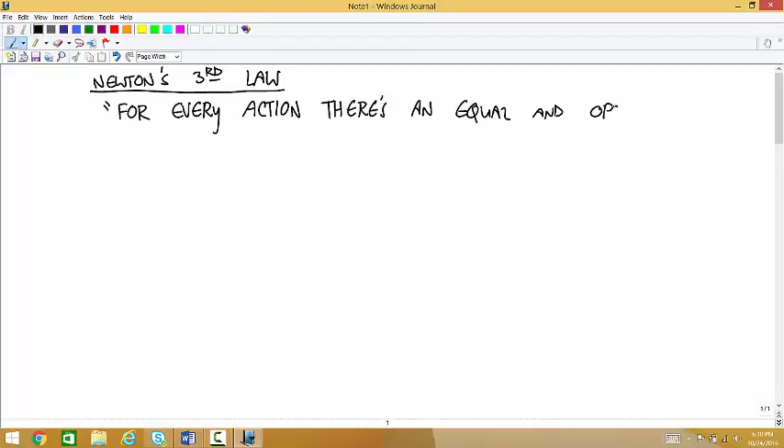So Newton's third law, as it was written, is something like this: for every action, there's an equal and opposite reaction. And that's pretty hard to use mathematically.

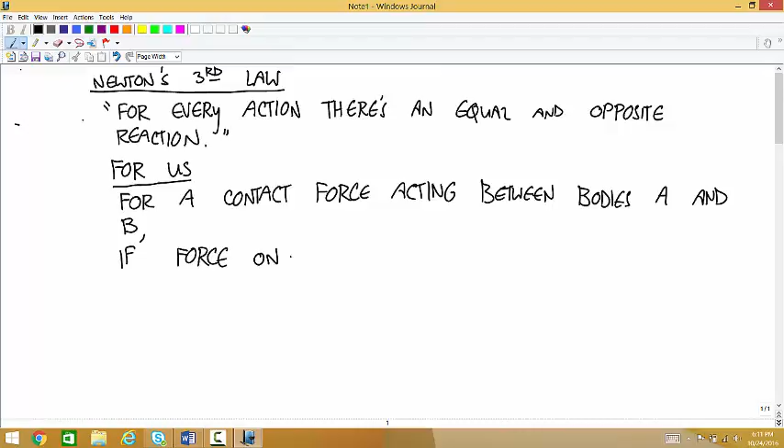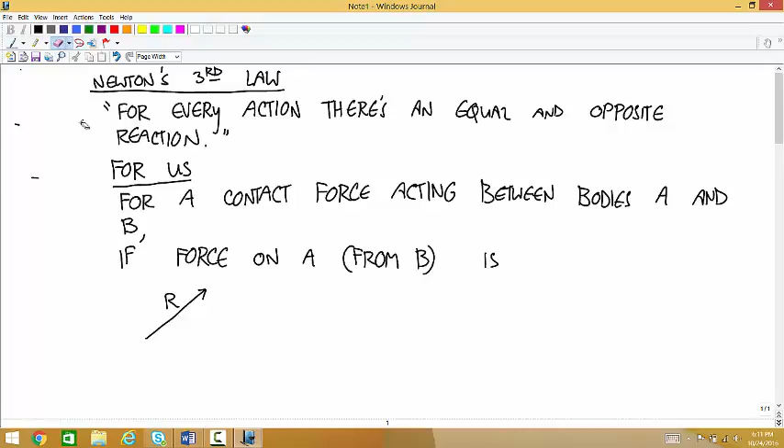So the way we're going to think about it is this: for a contact force acting between bodies, let's say A and B, if the force on A, and we're talking about this contact force, so this force on A has to be the force from B, is this with a magnitude of R. Then the force on B from A is in the exact opposite direction with that same magnitude R.

So going from one body to the other one, the magnitudes stay the same, and the direction gets flipped. The direction's opposite.

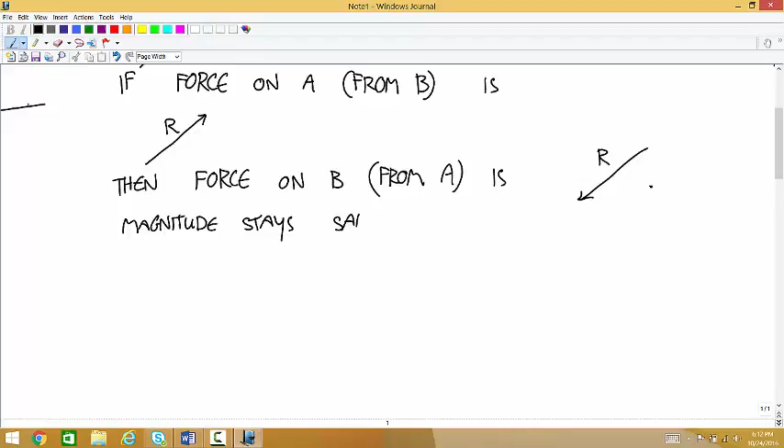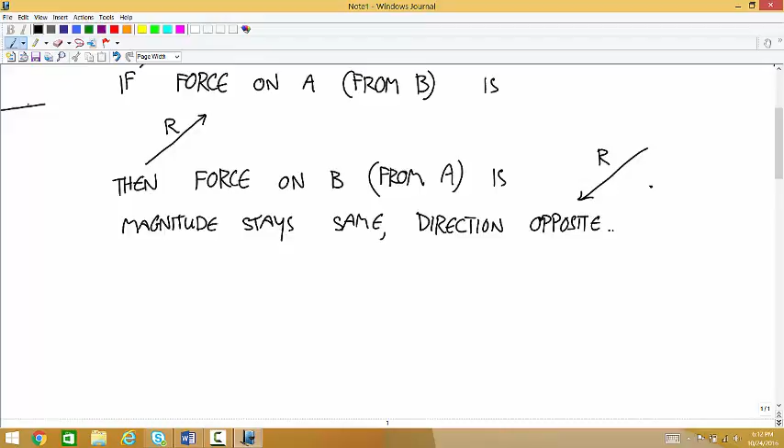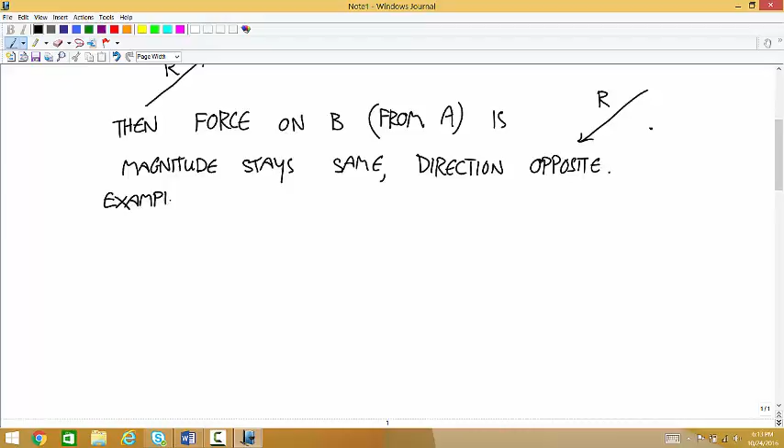So for example, if this guy is standing on the scale, and let's say he weighs 50 kilograms, and we want to calculate the force applied to, what do I want to do here, applied to the scale by the man.

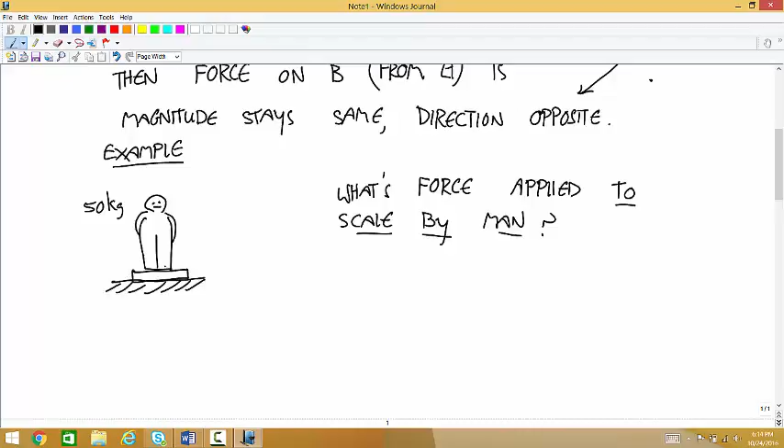Well, we're not given the mass of the scale, but say we knew what that was, say we knew it was 1 or 2 kilograms or whatever. If we isolated the scale, we still wouldn't be able to calculate that because you'd end up with 2 variables in the y direction. You only have 1 equation you can use in the y direction. And so the way to do it is we're going to isolate the man.

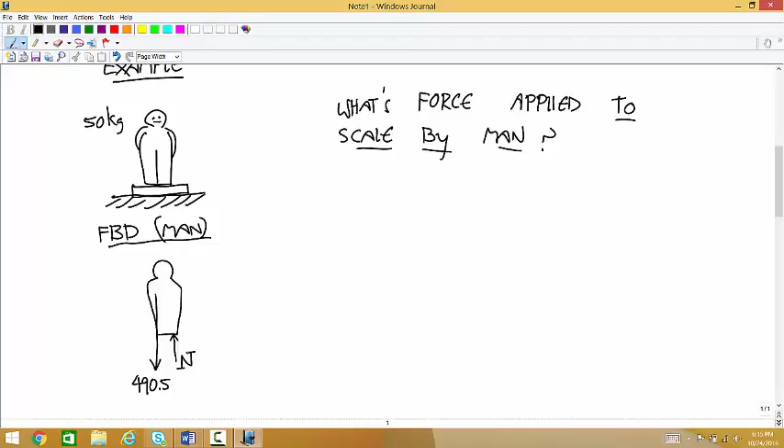There's the downward force of gravity. That's 50 times 9.81, so 490.5. Then there's this upward force, I'll call this N for normal. And Newton's second law says 0, negative 490.5, plus 0 n is equal to 50 times the acceleration vector, which is 0.

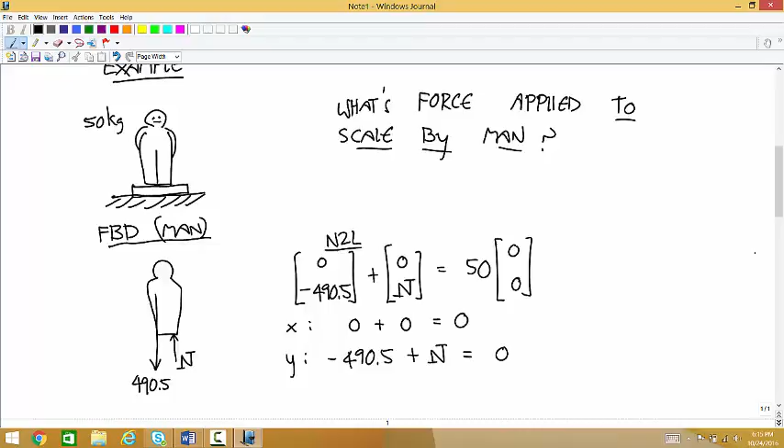And so you get an x equation that says 0 plus 0 equals 0, and a y equation that says negative 490.5 plus n is equal to 0. And so you can calculate that n is equal to positive 490.5.

Oh, by the way, this is something I'm going to do a lot when I use n as a variable for a normal force. I'll do like the fancy n with the shoes and hat. And when I'm doing it for newtons, I'll just leave it plain. Okay.

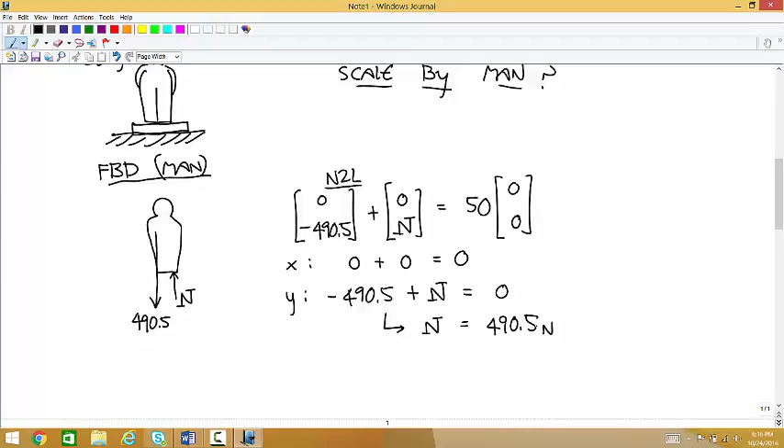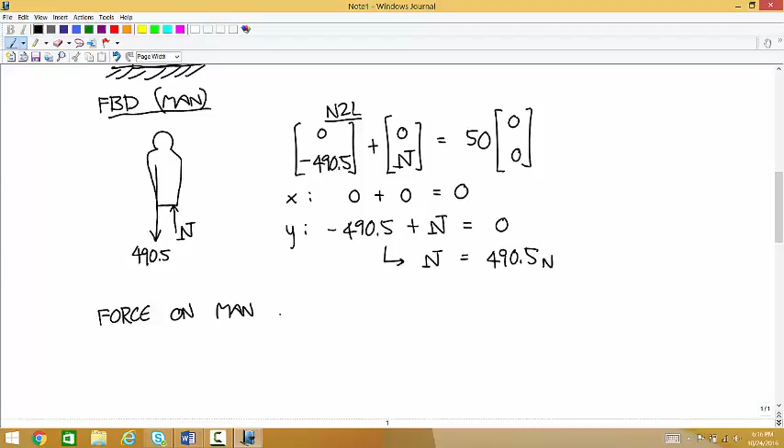All right, so in other words, the force vector on the man by the scale, we can get that by plugging this value for n into this vector. This is the force on the man by the scale. So plug that in, and you get 0, 490.5.

That's an upward force of 490.5. But that's not what I asked for in this question. I didn't ask for the force on the man by the scale. I asked for the force on the scale by the man. So to get that, we're going to use Newton's third law.

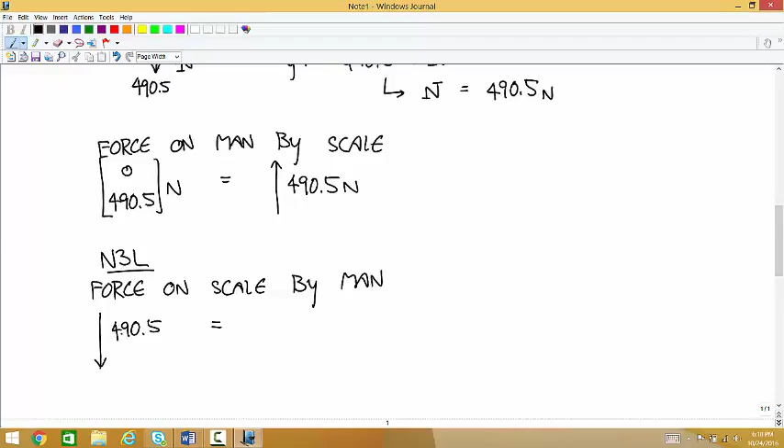Newton's third law says the force on the scale by the man. So we're dealing with the same contact force, but now we're talking about the one applied to the opposite body, and it is in the opposite direction, so down, with a magnitude of 490.5. If you put that in components, that's acting in the negative y direction with a magnitude of 490.5, so that's 0, negative 490.5 newtons.

Any questions about that? So that's Newton's third law. Do we have to go through all of those steps? Or can you just go, oh, it's 490.5 down, the normal force is? Yeah, you can do that. I think you'd be surprised a little bit at the pitfalls that come up, so it pays to be a little careful with it at first. But definitely that's what you'll do eventually after you've done a few problems. And maybe for some people it comes more quickly than others, for sure.

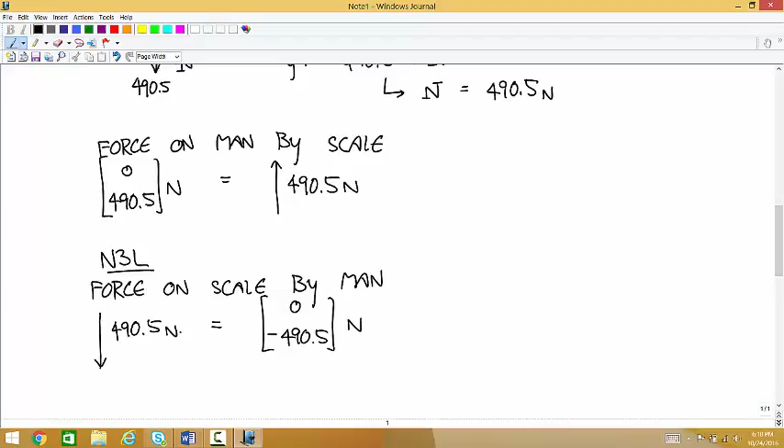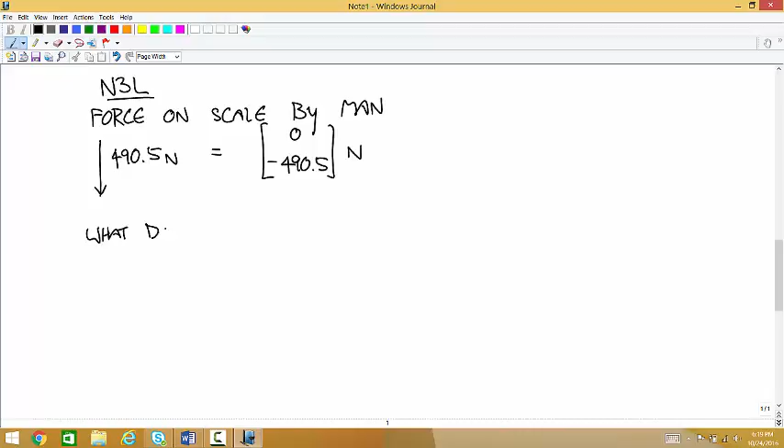But let's talk about what this means intuitively a little bit, because this is it mathematically, but what does Newton's third law mean? Its meaning is sort of counterintuitive. It sort of goes against your intuition about how physics works.

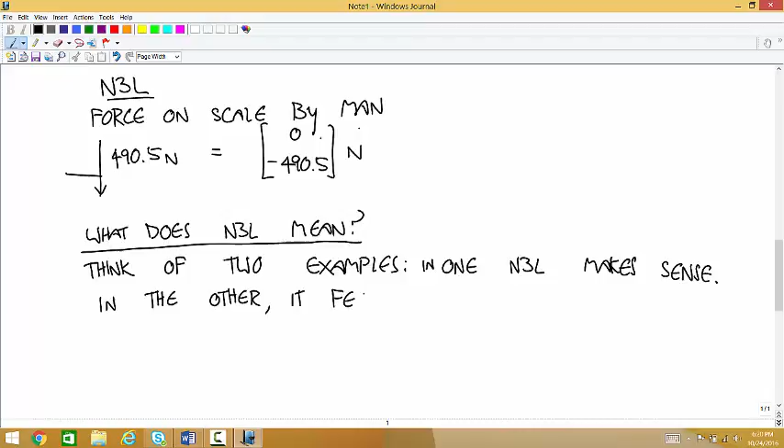So think of two examples. One, for most people, I think will make a lot of sense. It'll make intuitive sense, it works the way you think of it. So in one, Newton's third law makes sense. In the other, it doesn't - I think it probably goes against pretty much everybody's intuition. It feels wrong. Okay, so the first one - this is the one where I think your intuition about Newton's third law makes sense.

Now imagine it's a beautiful fall day and you're out on the soccer field - or somewhere with a barbecue, barbecuing, but there are some kids playing soccer. The ball gets by one of the kids and rolls over to you. You're minding your own business, tending the barbecue, and the kid says, hey, kick that back over here. You look up, and the kid is 5 or 10 yards away. Oh wait, this is important for the story - you're barefoot. You shouldn't barbecue barefoot. But the kid says, can you kick the ball back? And you're like, oh, no problem. You just kick the ball back, right? No problem - everyone would do the same thing, everyone would kick the ball back.

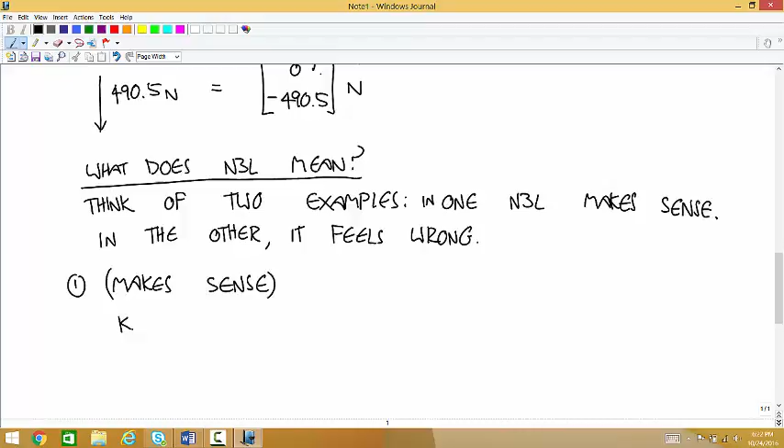So now imagine the same situation, but the ball rolls over to you, and you hear the kid yell, and you look up, and the kid's 100 yards away, and you're sitting there barefoot with the soccer ball at your feet. Now you have second thoughts about it - you grumble to yourself because you either have to bring the ball to them or kick it really hard, and if you kick it hard, it's going to hurt your foot. And the reason you know that is because of Newton's third law. To get the ball to go 100 yards across the field, you have to apply a big force to it. If you apply a big force to the ball, the ball is going to apply a big force to your foot - so that's Newton's third law. In our everyday life, we're used to the way it works - if you kick a soccer ball harder, it hurts.

Okay, now here's the one where it doesn't seem like it makes that much sense - it feels wrong. A home run hitter hits a baseball 400 feet.

Okay, so now it's a little harder to wrap your head around the fact that the ball is hitting this guy's bat as hard as his bat is hitting the ball. One reason it's hard to accept is you'd think, if that were the case, at least every once in a while the big guy with all the muscles would swing the bat, and the ball would stay right there, and he'd fly 400 feet. You'd think probably half the time, if it was really fair.

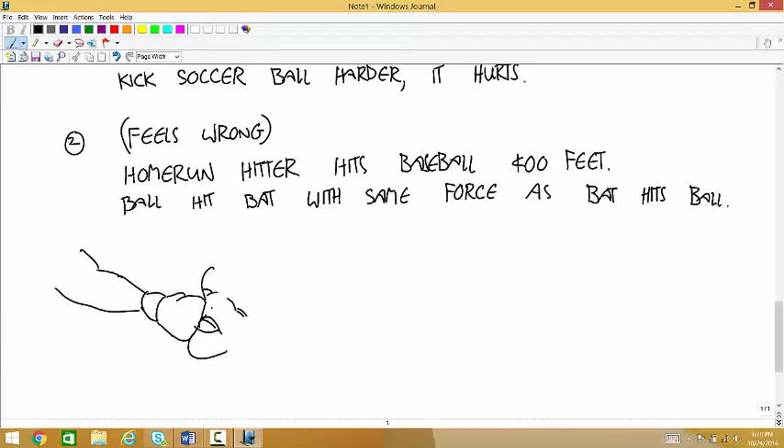And then he drew some version of this picture here. So this is supposed to be Mike Tyson's arm, and this is supposed to be his face. If I could hit Mike Tyson as hard as he hits me.

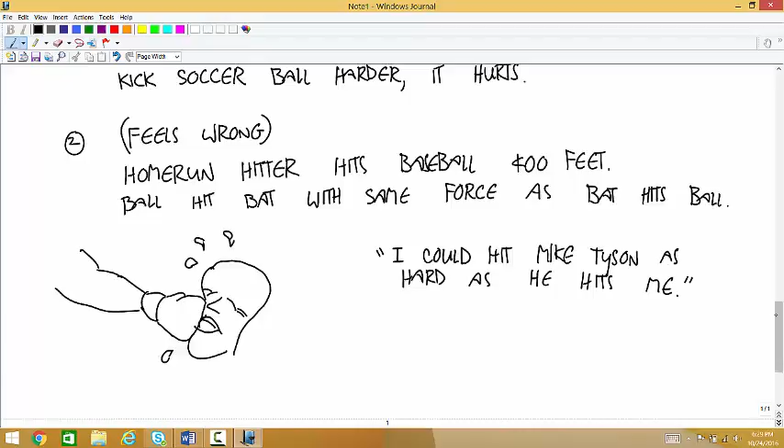And it's funny because it's 100% true. So let's think of the free body diagram of the glove, and a free body diagram of the deformed face. There's all this stuff going on over here and over here, but I'm going to ignore that. The only thing we care about is the contact force.

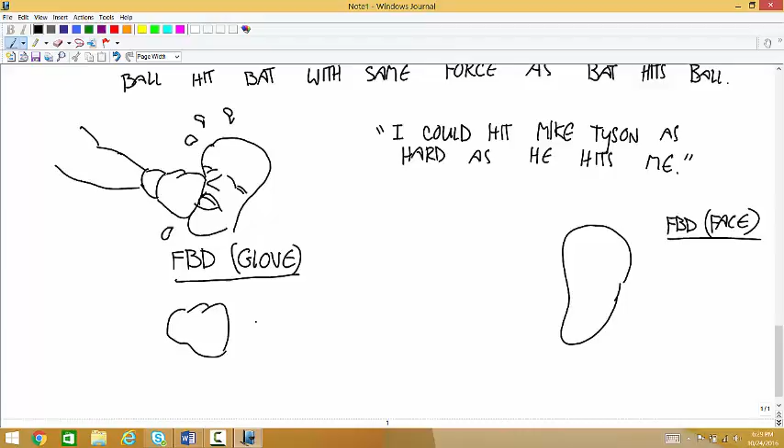The contact force says Mike Tyson applies a force this way of, how many pounds of force do you think? 2,000 pounds? Is that too much? 500? 100? Let's say 700 pounds of force. Okay, so Newton's third law says the face applies a force of 700 pounds to the glove. And if you had a sensor inside the glove, everything would check out, you'd measure it, that would be the case.

I guess the other reason it's funny is because it's not a very good boxing strategy to attack someone's fist with your face. The problem is there's a lot more important stuff inside your face than there is inside your fist. So these two forces are equal and opposite.

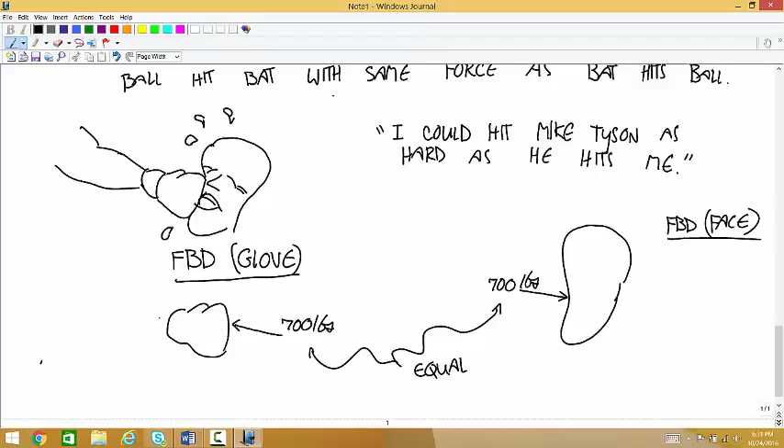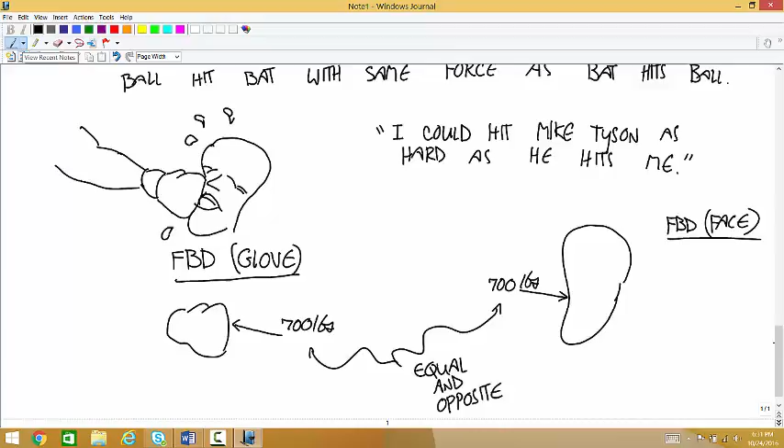Okay, so now let's use this in some problems. Let's say we have 3 carts rolling along the ground.

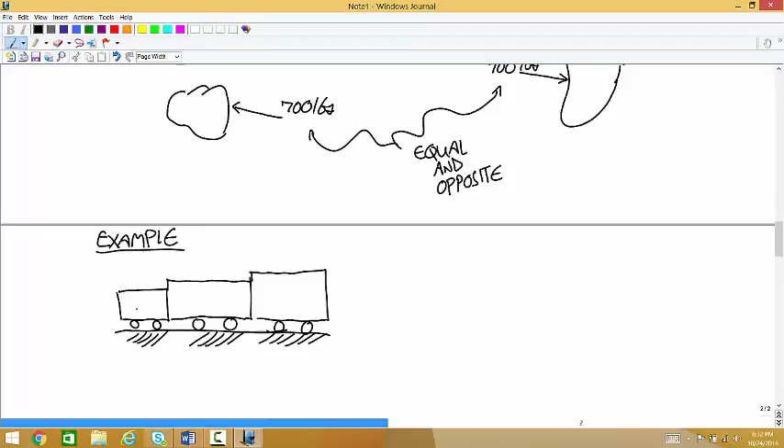This is 1 kilogram, the middle one is 2 kilograms, and this one's 3 kilograms. And there's a force applied to the right of the 1 kilogram cart of 25 newtons.

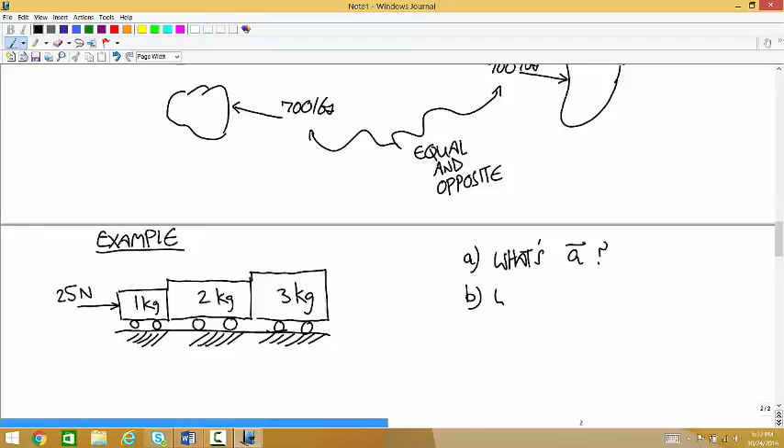So first, what's the acceleration vector? And these things are going to all move together the whole time, so whatever the acceleration is of one of them is the acceleration of all the other ones. And then second, what's the force applied to the 2 kilogram by the 3 kilogram?

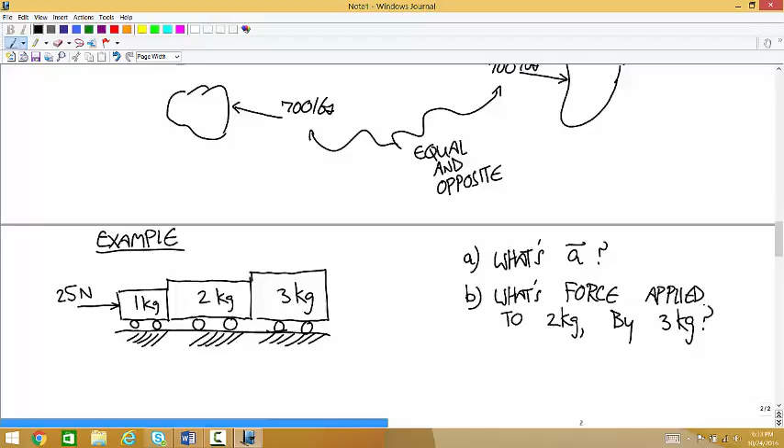Okay, so does anyone remember in a problem like this where the things are all moving together and we're trying to calculate the total acceleration, what do we want to isolate to get the acceleration? This is pretty much always the same. Everything. So we'll do a free body diagram of all 3.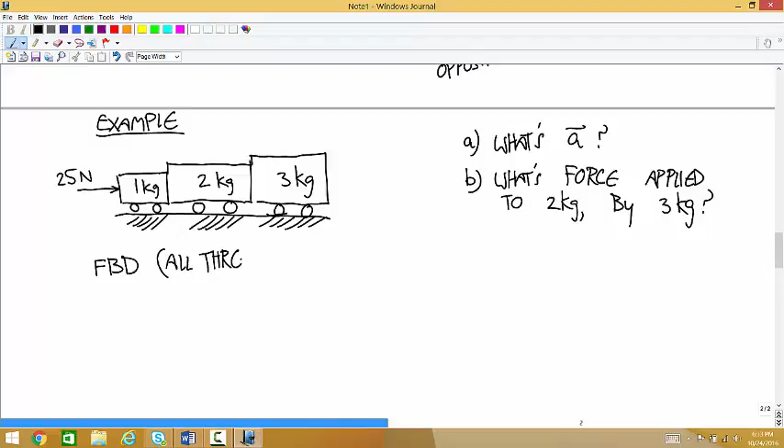There's a weight force. The total mass of this system is 1 plus 2 plus 3, so 6 times 9.81 is 58.86. Then there's a force coming up from the ground. That's the pushing contact from the ground. I'll just call that N total, N for normal.

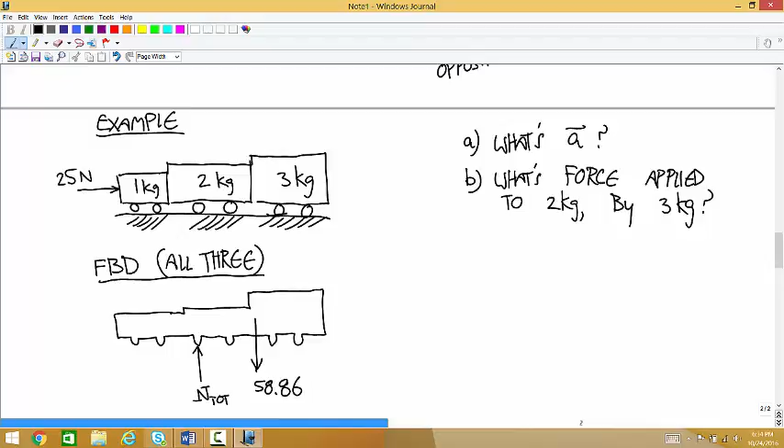And then the only other force on the boundary is the 25 Newton force on the left. Any questions about that free body diagram?

What about the forces between the 2 and the 3 and the 1 and the 2 and that kind of stuff? Those don't appear. And actually, now that we have brought up Newton's third law, now you can understand why only the forces at the boundary matter. If you take forces inside the boundary, we're looking for all the forces acting on this body, right? So the force on the 2 by the 3 is a force on this body, but the force on the 3 by the 2 is also on this body, and they're equal and opposite. Well, when you add those two up, they cancel out. And so all of the things inside have a matching force that cancels it out. The only things that don't have canceling forces are the things happening on the boundary and the weight.

Okay, so Newton's second law. 25, that's in the positive x direction. So 25, 0. N total is in the positive y direction, so 0, N total. 58.86 is in the negative y direction, so 0, negative 58.86.

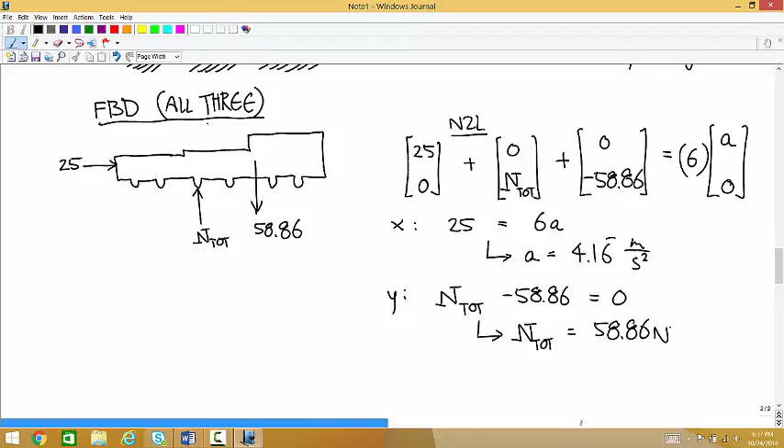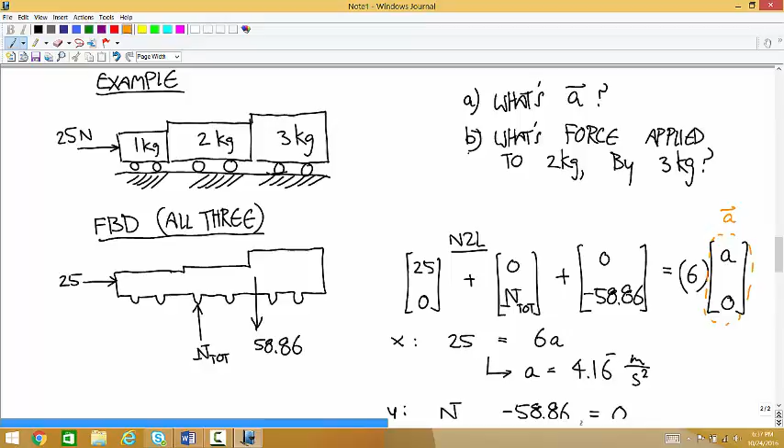Okay, so we were asked for the acceleration vector. So remember, this is the acceleration vector, we just didn't have a value for a yet. So now we can plug 4.16 into this vector as a. And we get that the acceleration vector is positive 4.16 repeating, 0. Any questions about that part?

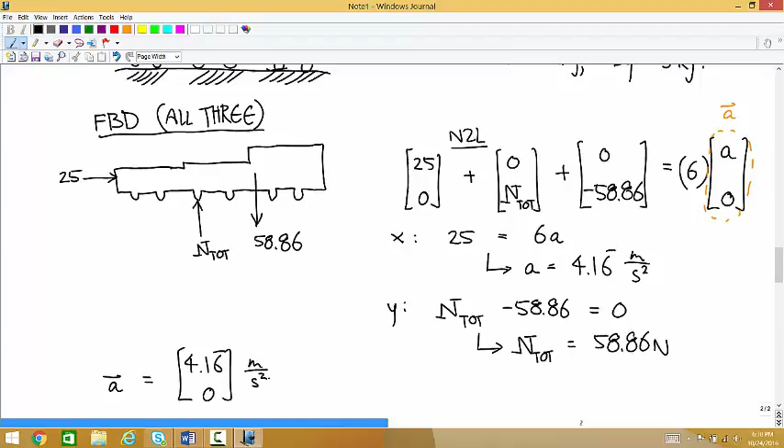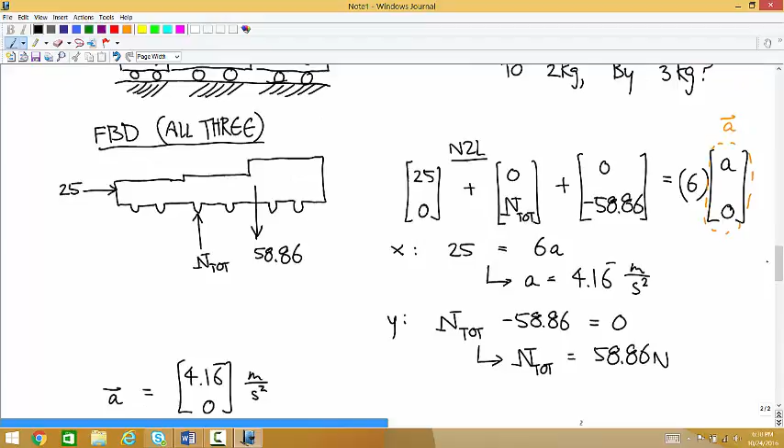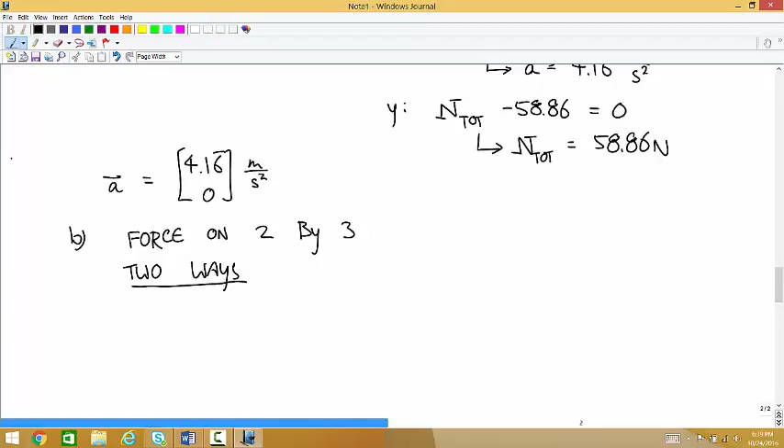Okay, so the second part is we want to figure out the force on the 2 by the 3. There are two ways to do this. One uses Newton's third law and one doesn't. I'm going to do it both ways so you can see we need to get the same thing, or they're not really both ways. So the first way I'm going to do it is with no Newton's third law.

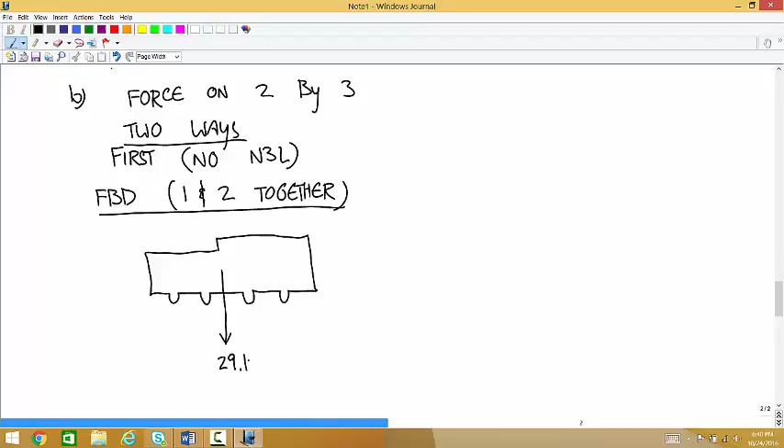So I'll do a free body diagram of the 1 and 2 kilogram carts together. There's a weight of 1 plus 2 times 9.81, so 3 times 9.81 is 29.43. There's an upward force from the ground. I'll call that N12, the normal force on 1 and 2.

And now we're just going to keep going around the boundary looking for places where the outside world makes contact with the boundary. If I'm going around counterclockwise, the next place I get is here. Notice that this is where, can you see my cursor? That's where the 3 kilogram cart would be. So there's a pushing contact on the 2 kilogram cart by the 3 kilogram cart. So that's perpendicular to the surface of contact toward the chosen body. I'll call that R for reaction.

And then I'll go around over here, and you have the 25 Newton force. So Newton's second law says 25, 0, plus 0, negative 29.43, plus 0, positive N12, plus, now this vector R is pointing in the negative x direction, so that's negative R, 0.

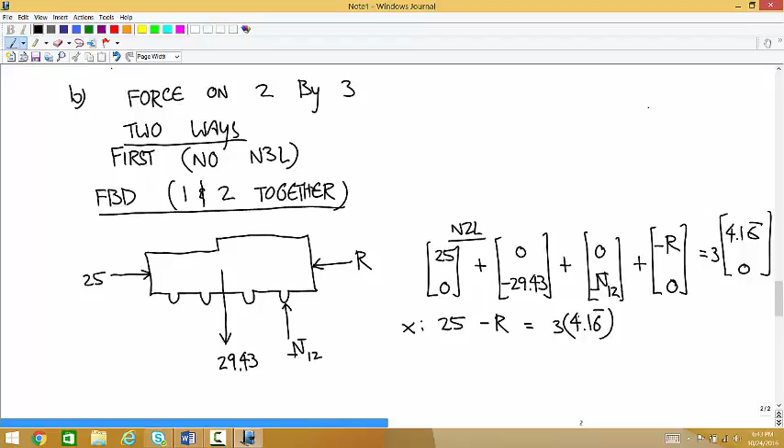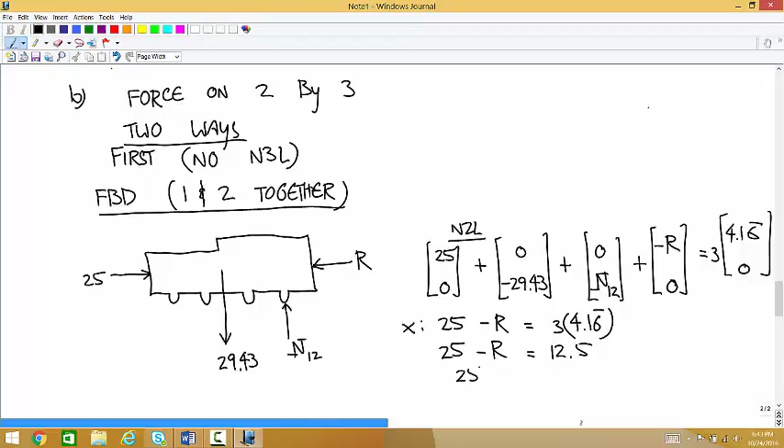All right, so the x equation says 25 minus r is equal to 3 times 4.16 repeating. And that is 12.5. Well, 25 minus r is equal to 12.5. So 25 minus 12.5 is equal to r. So r is equal to 12.5.

The y equation, we're not going to use that. We could if we wanted to solve for that normal force. Anybody have any questions about how I found r there?

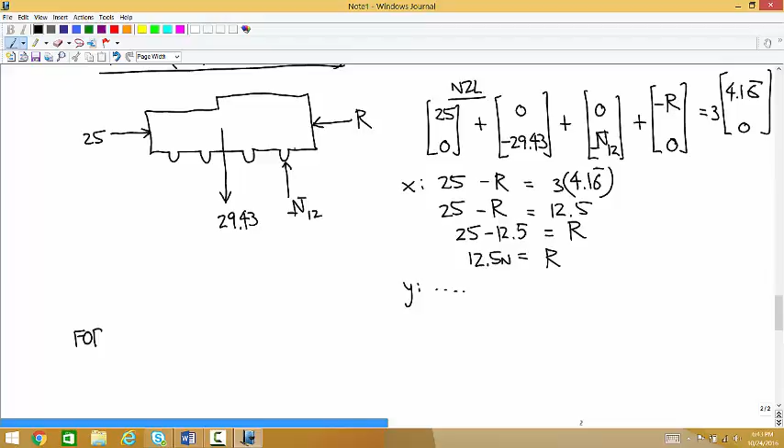Okay, so the force on 2 by 3 is this. So we just have to plug this value in for r. And we get negative 12.50. Or a force going this way, 12.5 newtons.

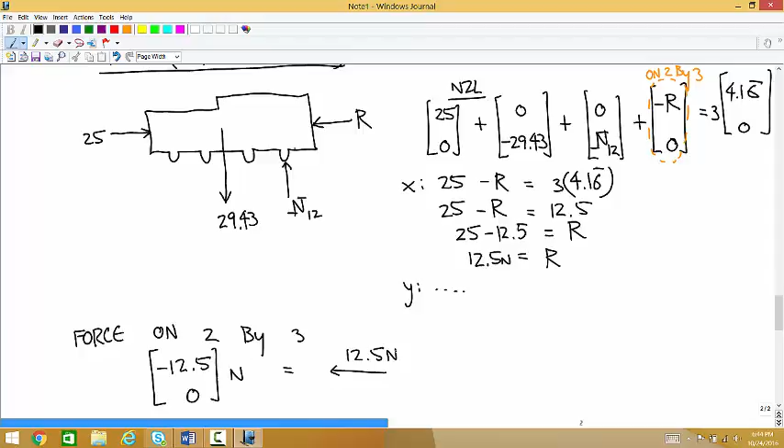Okay, that's one way. Here's the other way. This one we'll have to use Newton's third law. So this time I'm going to do a free body diagram of the 3 kilogram cart.

There's a weight force of 3 times 9.81, so 29.43. There's a pushing contact, I'll call that N3. And then if I keep going around counterclockwise, I get to this side where this 3 kilogram cart is in contact with the 2. That's a pushing contact, so it's toward the chosen body. I'll call that R.

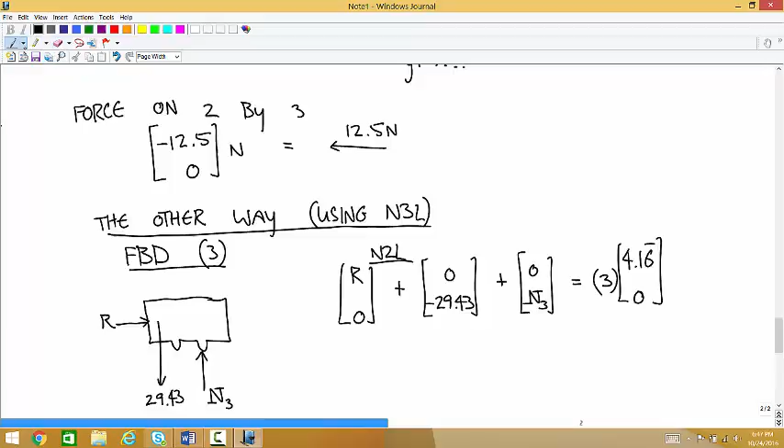So the x component says R is equal to 12.5. We can ignore the y equation again.

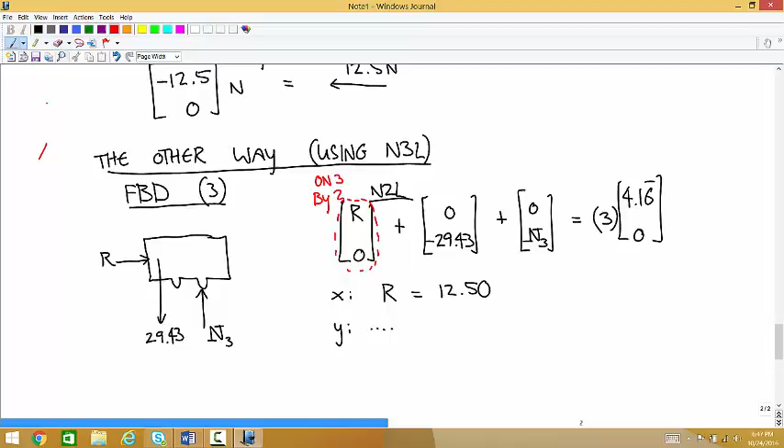Okay, so now this vector here, what does that represent? The force on what by what? That's the force on 3 by 2. And so if we plug this value for r in here, the force on 3 by 2 is 12.50. And the other way you can write that is it's a vector this direction, horizontal, with a magnitude of 12.5.

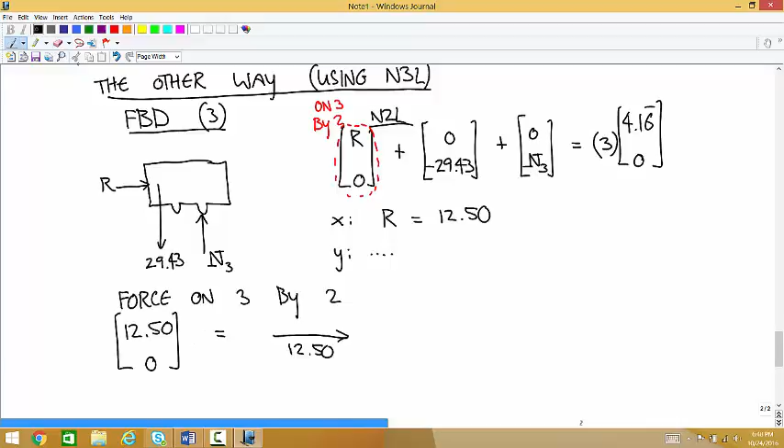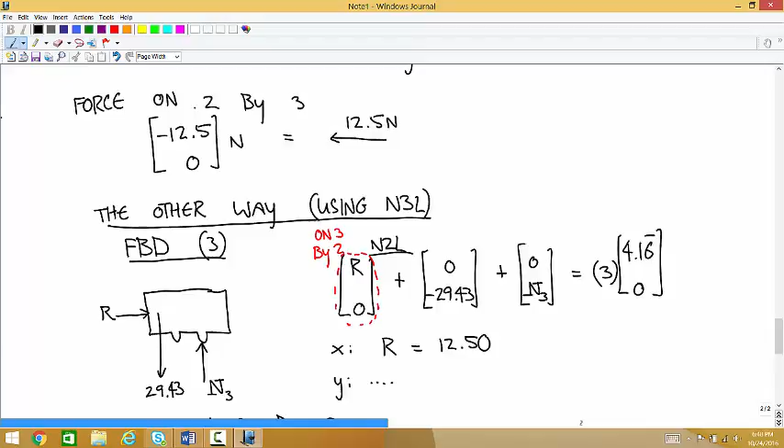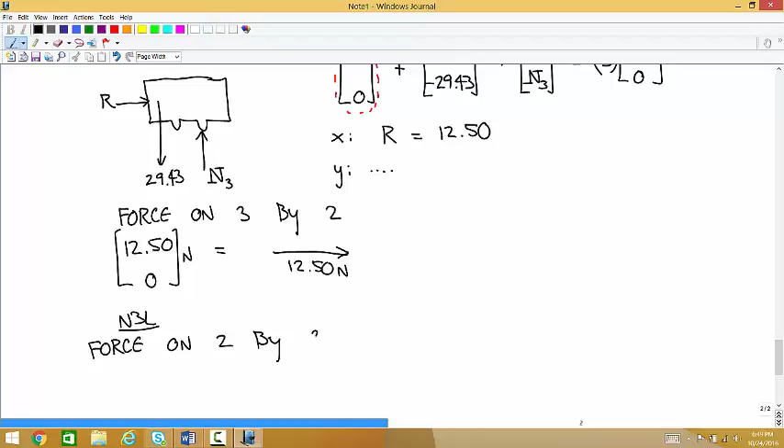Does that match what we got before? No. So what's wrong? Yeah, so what we have in the other example, we went straight to the force on 2 by 3. And we got that negative x component. This time we went to the force on 3 by 2. And we got 12.5 moving to the right. What we're asked for is the force on 2 by 3. And so Newton's third law says the force on 2 by 3 is in the opposite direction with the same magnitude. And that's 12.5 in the negative x direction.

So if you want to write that in components, that's negative 12.50. Any of those are fine. If I ask for a vector, then you need to either show the direction and the magnitude, or you need to show the components. But that has the same amount of information in it.

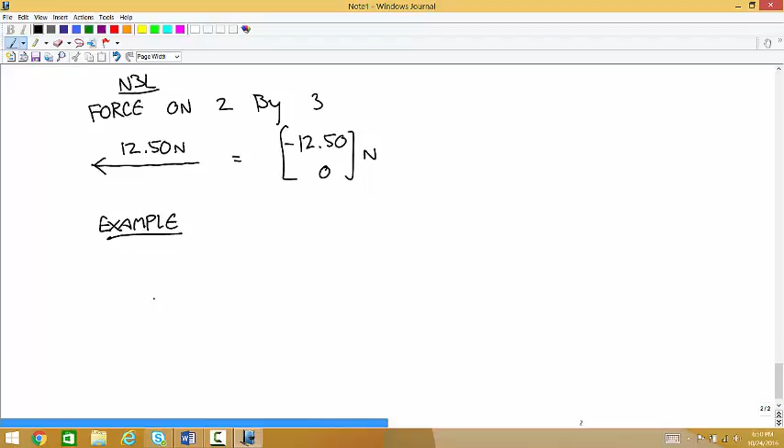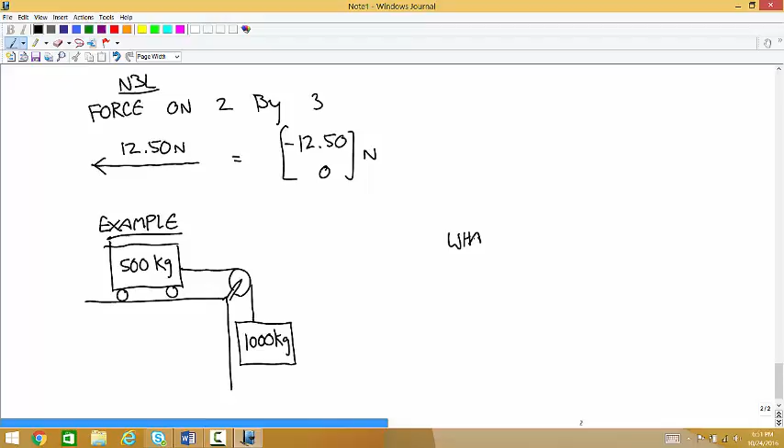So now let's do this one. So there's a cart that's rolling along a ledge, and a cable connects over a pulley to another mass that's hanging below. Let's say the one up above is 500 kilograms, and the one hanging down is 1,000 kilograms. And we want to know what's the acceleration vector of the cart.

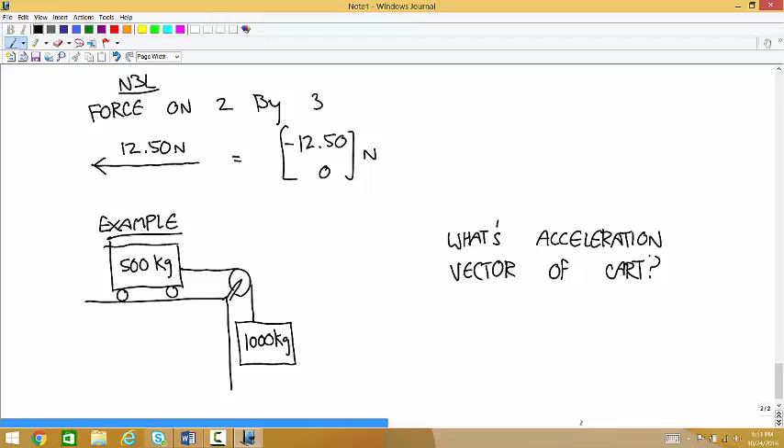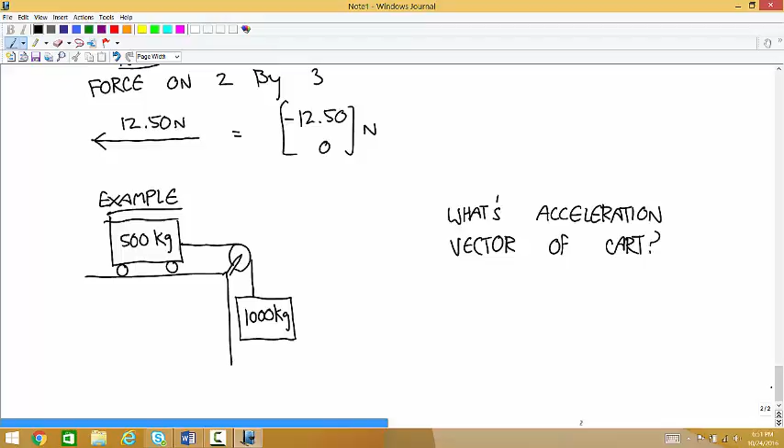Okay, so this is whenever you see objects that are connected by, I guess it's always going to be connected by a pulley, moving in two different directions, there's this trick that you have to recognize. A trick for these kinds of problems.

And that is that those two accelerations, the acceleration of the 500 kilogram cart and the acceleration of the 1,000 kilogram mass, they're not the same vector, right? One is going to be accelerating horizontally and one's going to be accelerating vertically. But they're also not independent of each other. Okay, can you see that? If this one has a big acceleration downwards, this one has to have a big acceleration to the right.

And I think the best way to think of it is they just move in lockstep. If you move this one down an inch, this one has to move to the right an inch. So are the acceleration vectors just flipped? So the magnitudes of the accelerations are the same. And you have to just think about the direction, because that can change problem to problem.

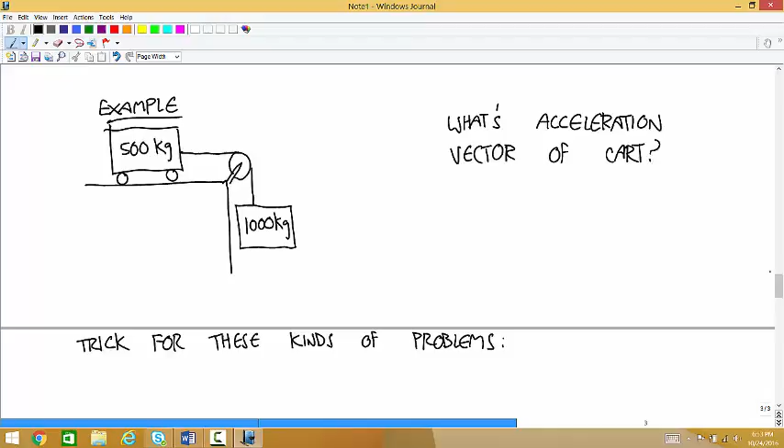The acceleration vectors have the same magnitude, just different directions. The way to think about it: you can choose either one as your reference. Let's say this one is moving in the positive x direction. Which way is this one moving? Negative y direction. So if we call the acceleration of this one a, 0, because we know it's going to be horizontal, we have to call this one 0, negative a. A positive value for the acceleration in the x direction means a negative value for the acceleration in the y component of that one.

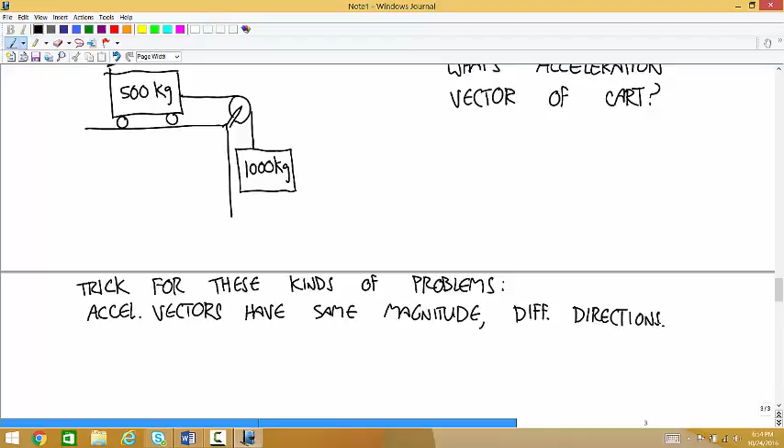So if the acceleration vector of the 500 is a, 0, then the acceleration vector of the 1,000 is 0, negative a.

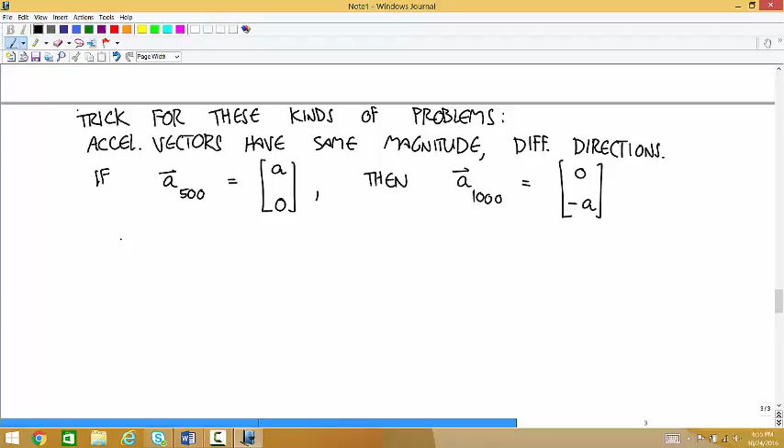Okay, so I'm going to start with a free body diagram of the cart. The forces are the weight, so 500 times 9.81 is 4,905. And then there's a pushing force from the ground onto the wheels.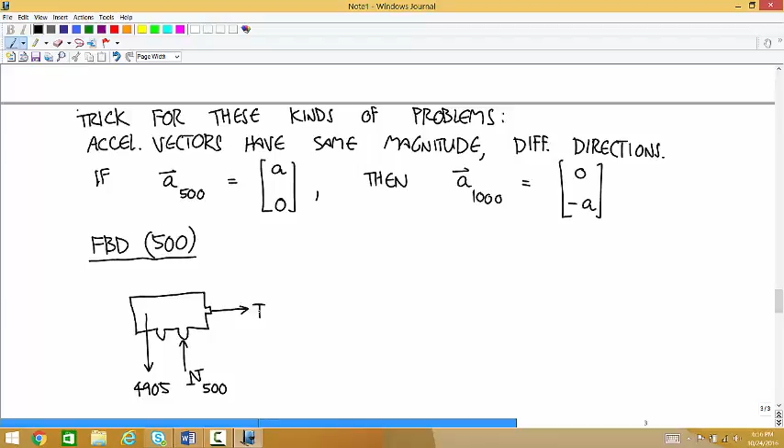I'll call that normal 500. And then there's the force from the cable. I mentioned this before, that I'm in the habit of including just a tiny little bit of that cable in the body that you isolate. Then the force comes out of that stump of cable, so I'll call that T. There's no other forces acting on this.

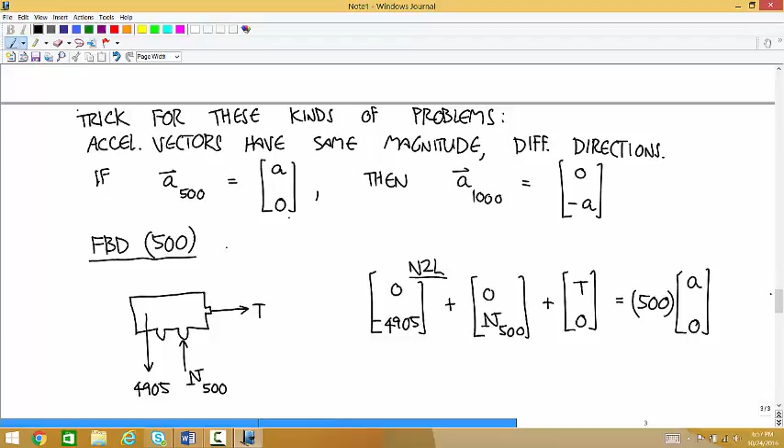So Newton's second law says 0, negative 4,905, plus 0, n500, plus T, 0, is equal to the mass, 500, times the acceleration vector that we're just going to write as a, 0. And this vector is what we're trying to find, that's the vector a500.

Okay, so the x equation says T equals 500a. Can we solve that? No, we have one equation, two variables, so you can't go any farther than that. But let's just set that aside as something useful, and we'll come back to it later. What we're trying to come up with is a system of equations that we can solve, so I'll call this equation 1. The y equation isn't going to help us on this, I'm just going to leave that one alone. If you wanted to calculate that normal force, you could.

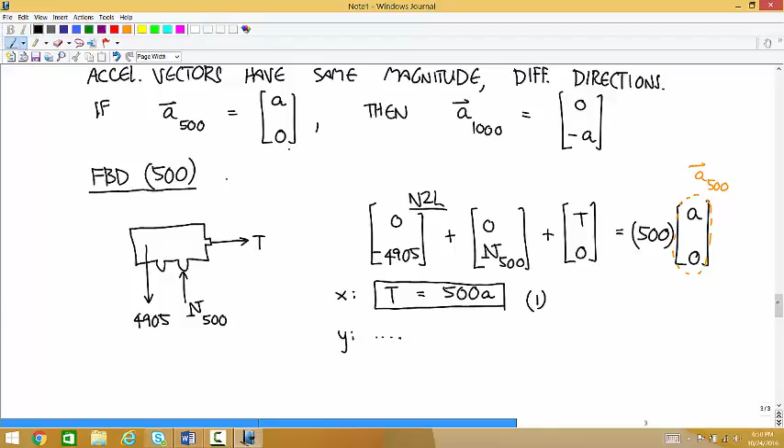And now let's go to the hanging mass, so free body diagram of the 1,000. There's the weight, that's 1,000 times 9.81, so 9810. And then the only other place there's contact is where the cable touches it, so we know that cable force acts straight up out of the stump.

Do we know anything about its magnitude? We do know one thing, we don't know the number. We know it's the same as the T that we already named because it's the same cable, all it does is go over pulleys. So make that T.

And now Newton's second law says 0, negative 9810, plus 0, t, is equal to the mass, 1,000, times the acceleration vector. Now this is where we have to use that relationship between acceleration vectors that we came up with at the beginning. So I'm going to write this acceleration vector as 0, negative a. That vector is a 1,000.

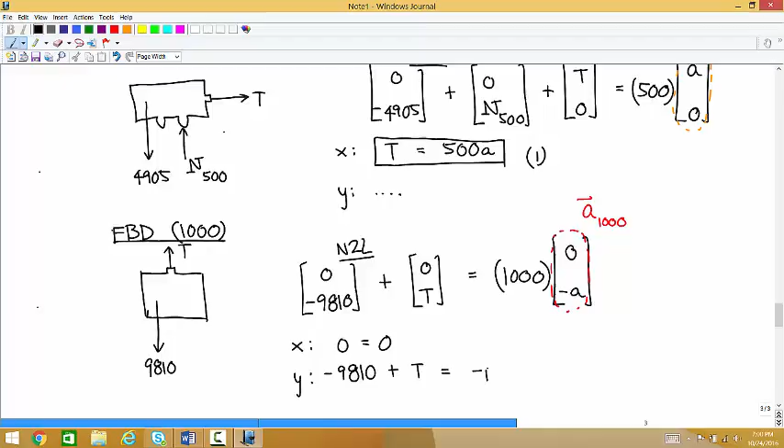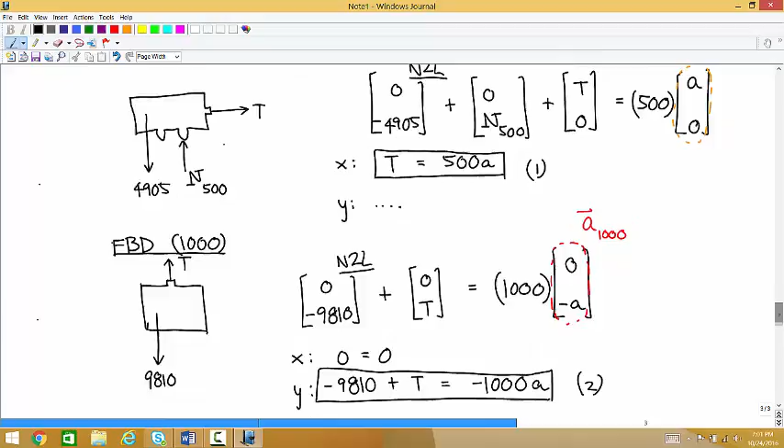The x equation says 0 equals 0, so that doesn't help. The y equation says negative 9810 plus t is equal to negative 1,000a. Can we solve this equation? No, we can't do it by itself because it's one equation with two variables, but what we can do is call this equation 2. And now equation 1 and 2 together are a system of two equations for two variables.

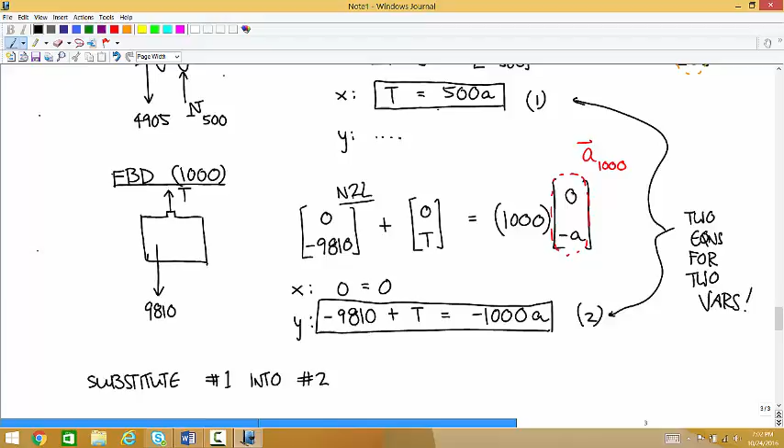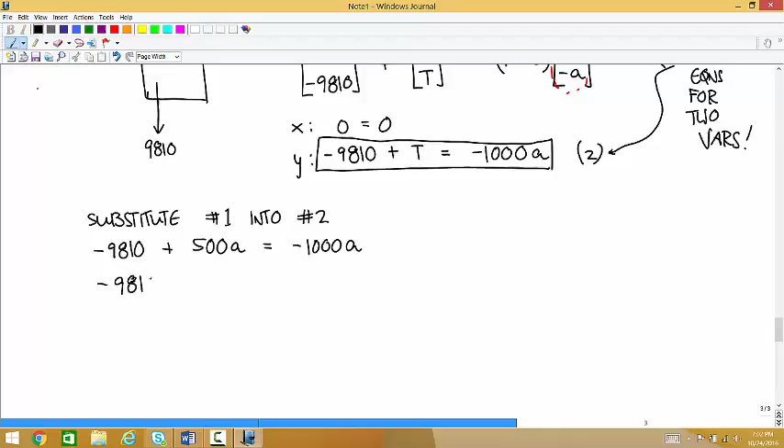The easiest way to do this is substitution. So I'm going to substitute equation 1 into 2. T is equal to 500A, so this combined equation says negative 9810 plus 500A is equal to negative 1,000A. And now we have one equation for one variable, negative 9810. Subtract 500A from both sides, you get negative 1,500A. Solve for A.

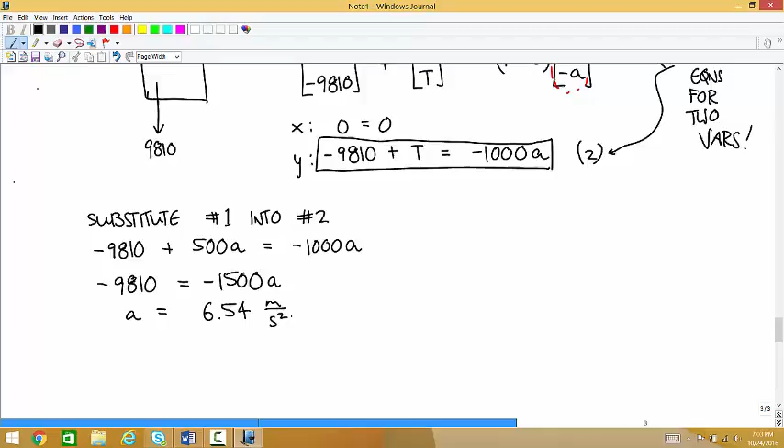And you get 6.54. So A is equal to positive 6.54 meters per second squared. We were asked for the acceleration vector, so a500, we'll take this value, plug it back into this vector, and we get 6.54, 0. Any questions about that?

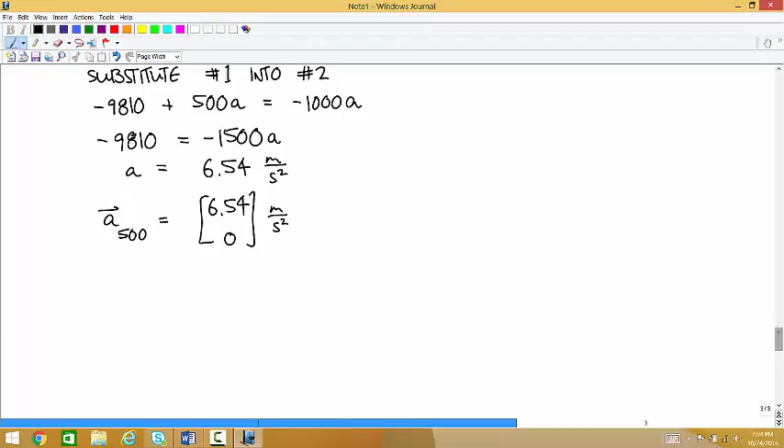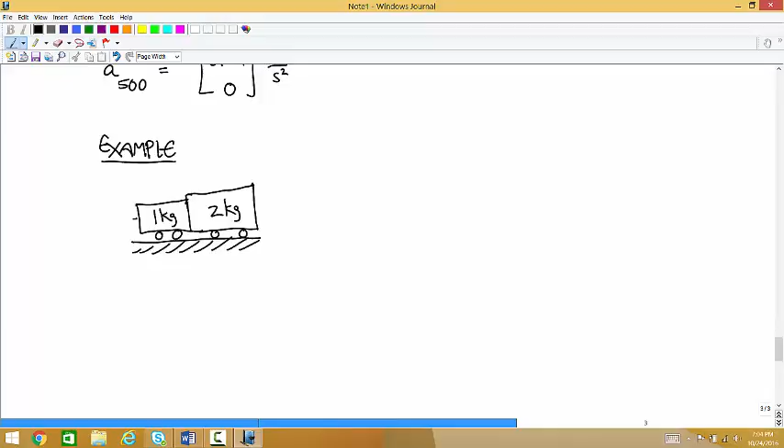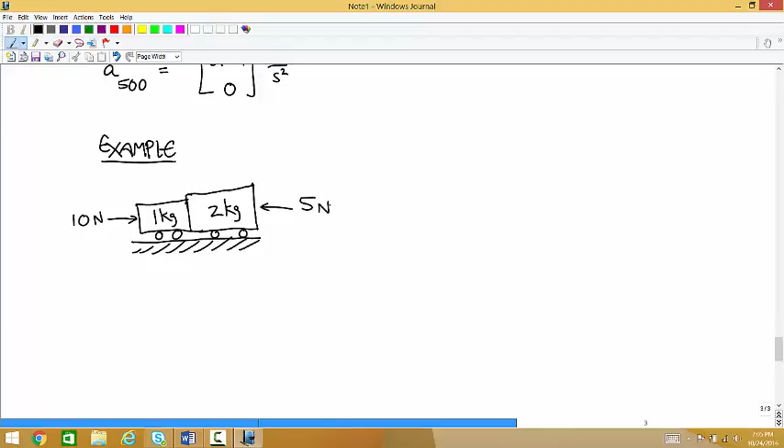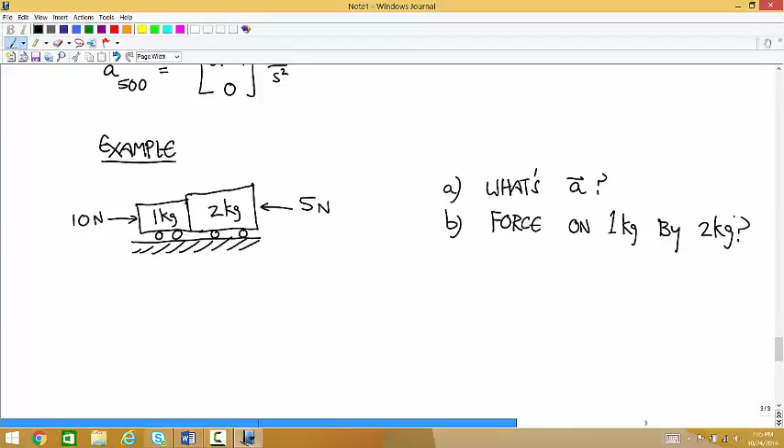Okay, let me give you one to work on, and then maybe I'll just start with this next time. I don't know how long this will take. So let's say that we have 2 carts on a flat surface. A force is applied to the 1 kilogram cart of 10 newtons pushing to the right, and a force is applied to the 2 kilogram cart of 5 newtons pushing to the left. We want to calculate the acceleration vector, and we want to calculate the force on the 1 by the 2. Okay, so see if you can think through that one, and let me know if you have questions.